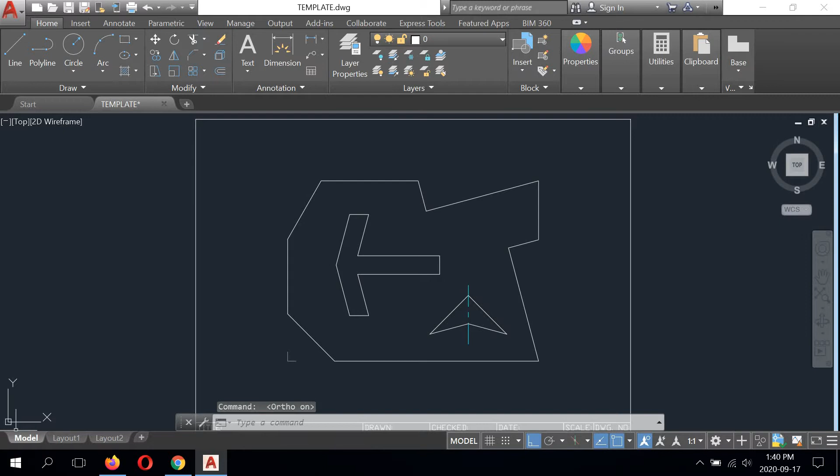And we're going to start with our linear dimension tool in the annotation toolbar, and we're going to begin by running this dimension here.

Now you can go in any order you like, as long as the end result is good, that's all we care about. So this first dimension comes out 12.

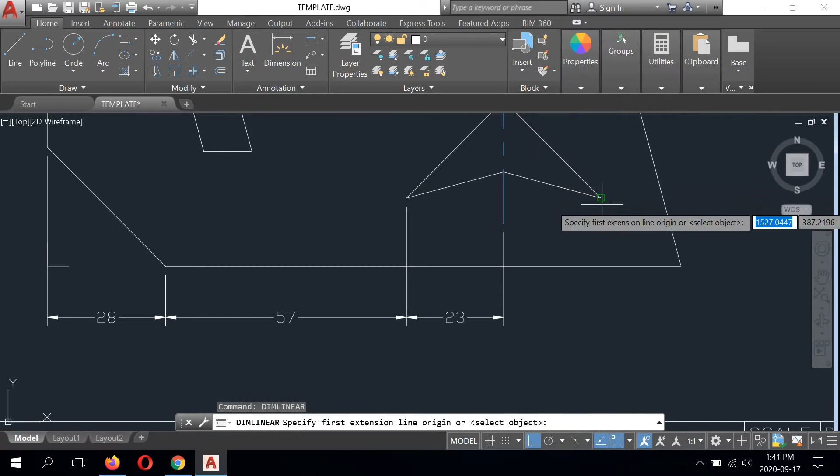So I'm going to run another linear dimension from here. Snap that one right in line with the 28. Right click, repeat, from here to the center line. Right click, repeat, and from here to the center line. Very easy.

Alright, we have a 16 dimension. We're going to repeat, run from here, snap that right in line with the edge of the arrowhead, and come out 12 millimeters.

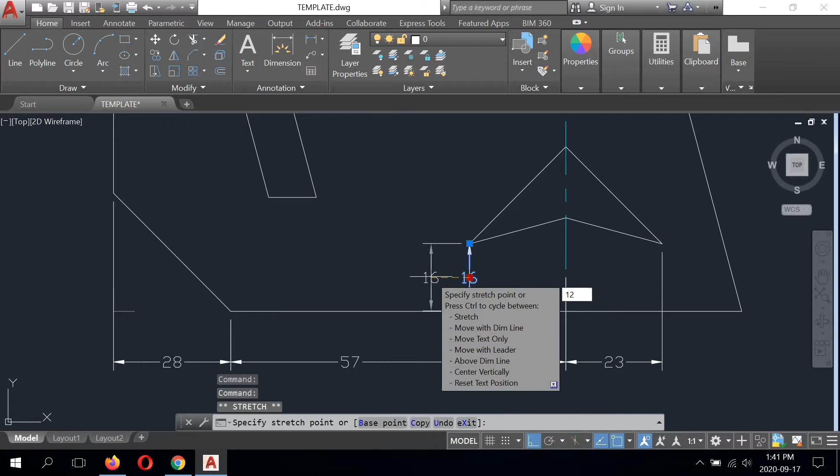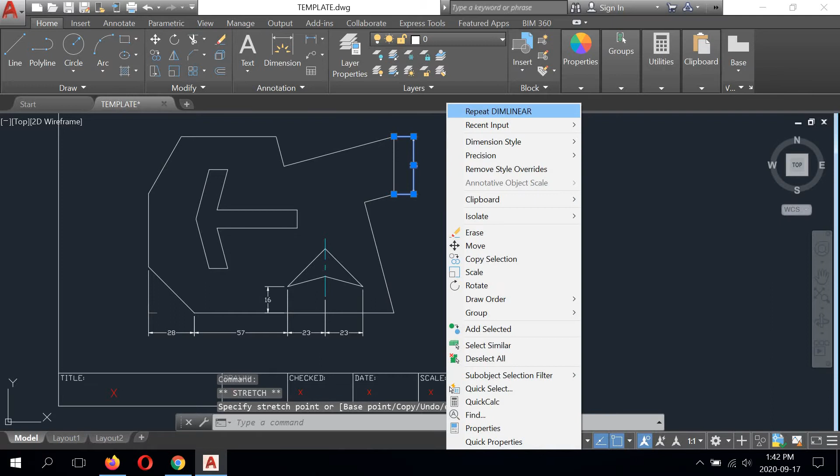We also have some dimensions to run on the right side, so we're going to right click, repeat dim linear, bring this one out 12, and then right click, repeat, and run this dimension.

Same thing on the top. Right click, repeat. We've got the 72 dimension here, so we're going to snap it in line with the part as you were shown and come up 12 millimeters.

Now this 20 dimension on this side, right click, dim linear. Here's a review of something I showed you in dimensioning the reversing washers. I'm not going to snap this one in line, I'm just going to come over here and touch the endpoint snap here, and that is going to bring it totally in line with the 72.

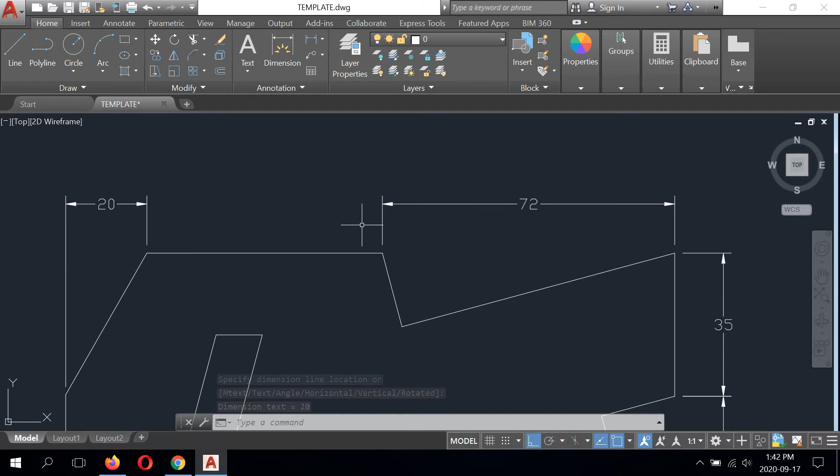Right click again, repeat dim linear. I don't need another 20. We're going from... well actually, I'm going to leave that 29 alone for now, and there's a reason for that.

So I'm going to do the 150 dimension. I'm going to bring this right in line with the part. And because this is the third stack, it's going to be 12 plus 10 plus 10, so it's going to be 32. So I'm saving myself some room here to put that 29 in later.

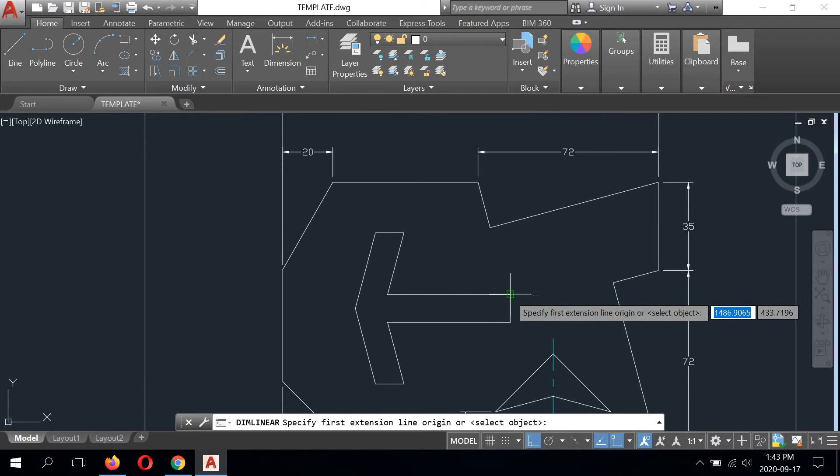All right, continuing on, we have the 49 dimension. Snap that one in line, come up 12. And we also have this 11.

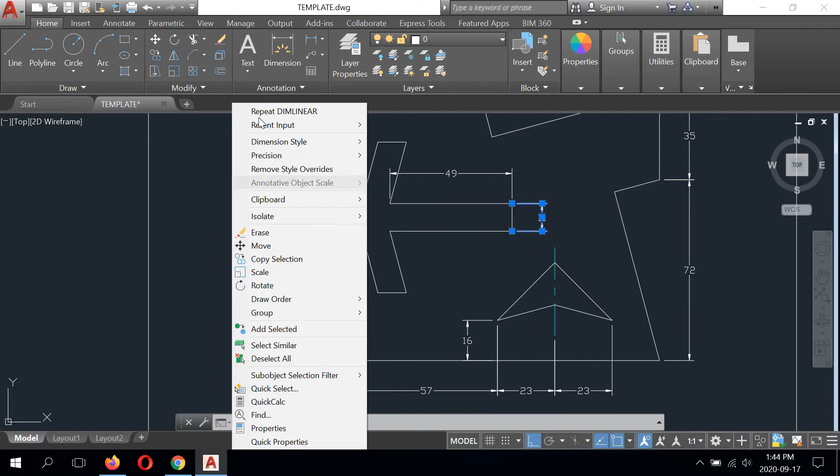And we have the dimensions on the left side as well. So repeat dim linear, we have this one to here. We're going to snap that one in line with this vertical line and come out 12. And the other two will be as easy as pie because we're just going to copy that reference point.

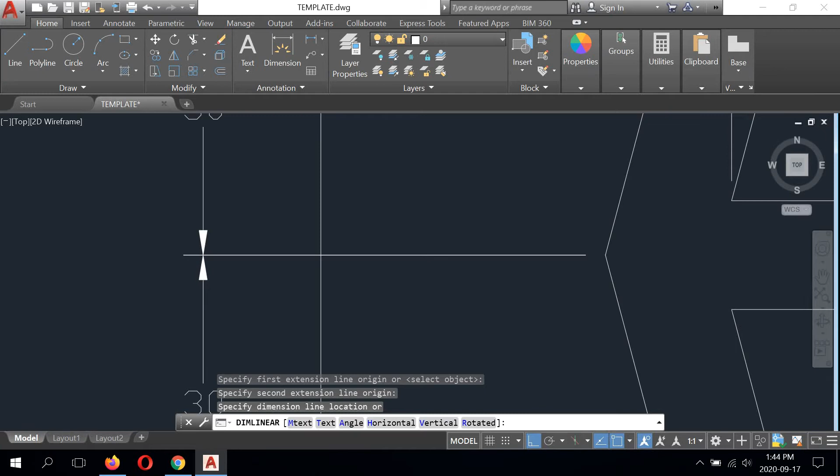Okay, so that takes care of almost every linear dimension on this drawing. At this stage, just to eliminate some contrast, I'm going to start throwing what I have onto the dimension layer already.

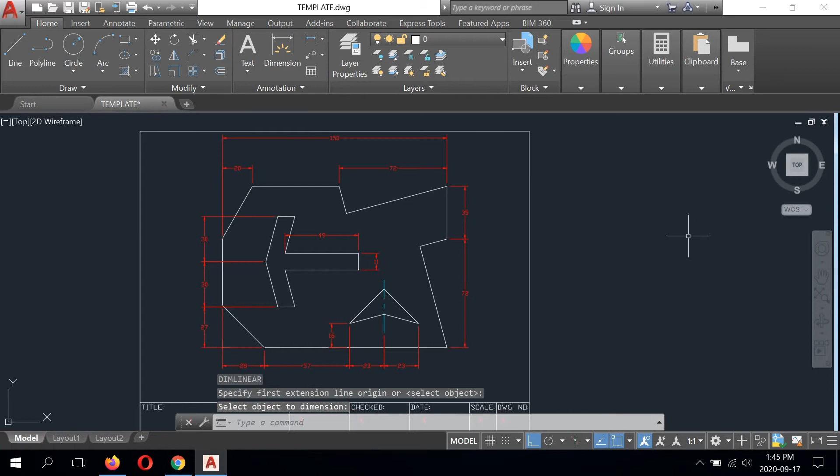Dimensions. Got it. All right, so we have an aligned dimension here, and this is something that we did on the Eye of the Eagle drawing. So we're going to grab aligned, grab the midpoint, and then find perpendicular, and click that perpendicular line, snap, I should say, and we're going to have our 11 dimension put in place exactly where it needs to be.

And we also have the 45 degrees and the 30 degree angles to do. So we're going to grab the angular dimension, pick the angular line and the horizontal line, and we're going to pull this until the arrowheads come in on the inside, like that, 45 degrees.

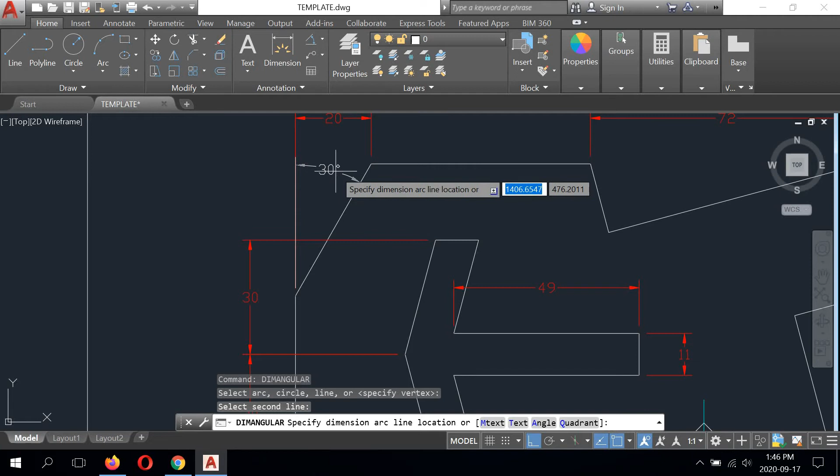We also have a repeat dim angular because we're going to do the 30 degree angle. Same thing, we're going to just drop it as soon as those arrows become inside, like that. Like I said, angular dimensions may not line up exactly with my drawing, but as long as they appear the way they need to be and they're close enough, that's all that counts.

Now, some of these other ones are going to be a little more tricky, and this is also a review of the reversing washers drawing when we had to do the bevels on the left and right hand sides. So I'm just going to take a moment and throw all this onto the dimension layer.

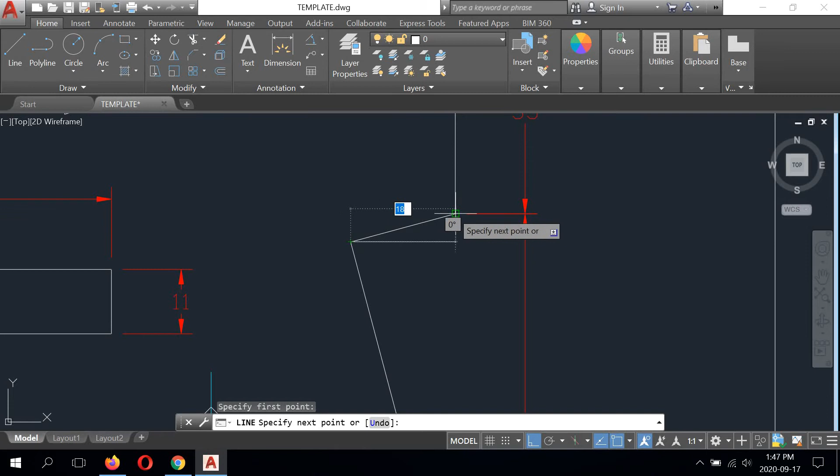Keeping in mind I can't hit the escape key, alright, so what we're going to have to do is draw some lines. So we're going to grab the line command. I'm going to draw a line at this endpoint, and I'm going to O-track it. This is something I showed you earlier in the previous lesson. Right click, repeat line, snap to endpoint, touch, O-track.

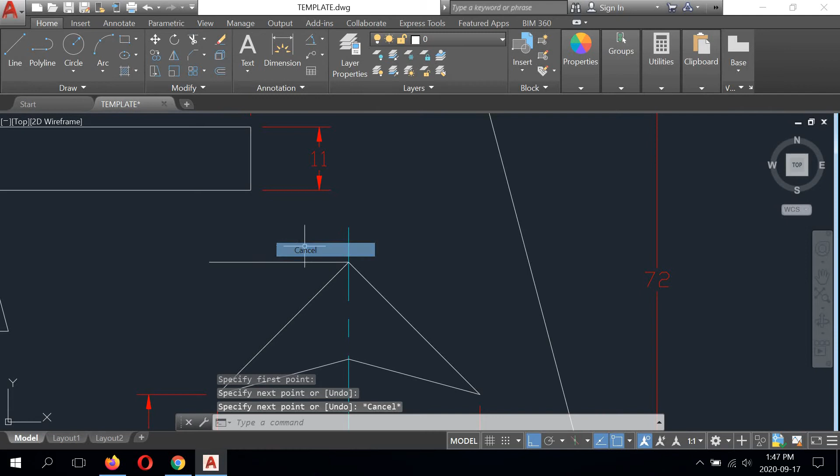I'm just going to bring this out to look similar to the image on the iPad. I don't really know how long it is exactly, so I'm just going to guess the length of this line. As long as it looks okay, it's good enough.

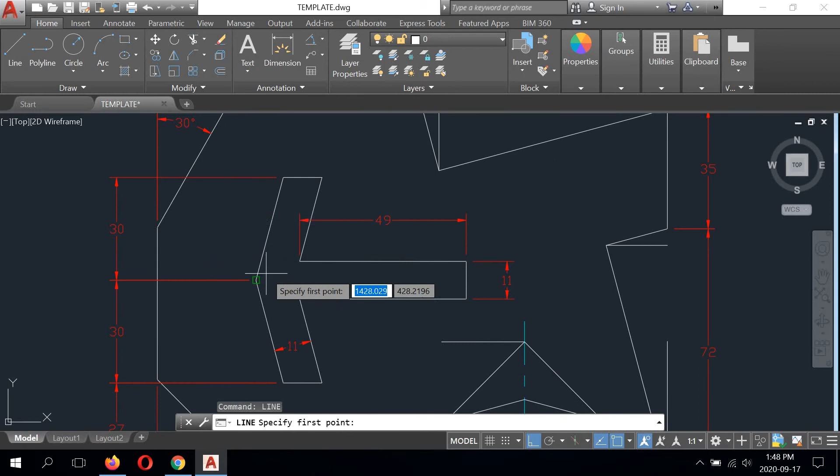We also have another one we're going to have to do here, and another one here. I'm just looking to see what I've done on my screen so I can try to copy it as best as I can. There's no point making it go super long. We also have another one here. This is part of the reason I left that linear dimension out earlier.

All right, so now we're ready to run some angular lines. Actually, I've forgotten one, sorry, there's one down here. Have that one come to about here. So now I believe I have them all.

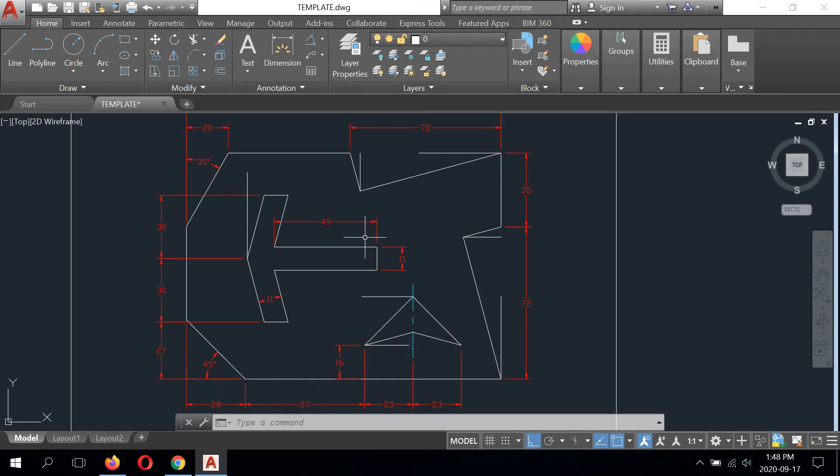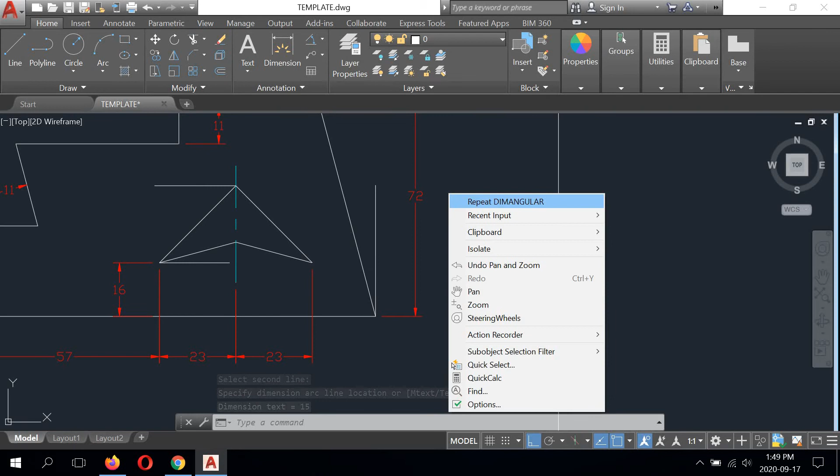So what we're going to do is grab our angular dimension, which is already set. We're going to select it, select this line and this line. And we've got our 15 degrees here. Repeat. We've got this one. That's 15 degrees.

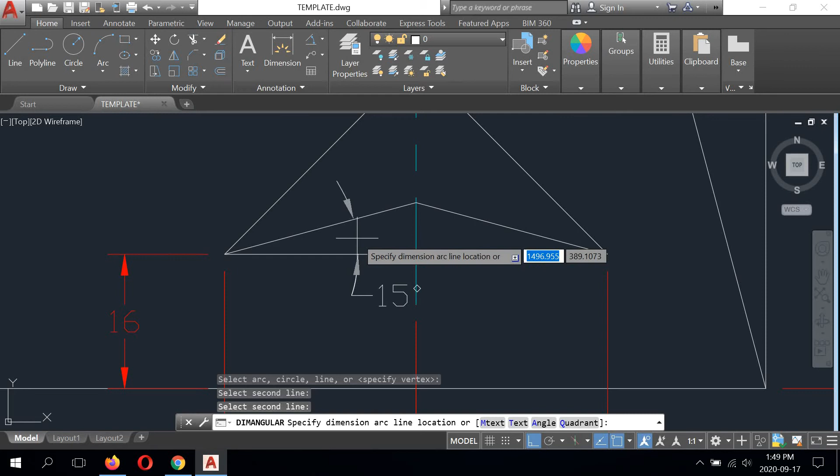Want to make sure that degree symbol doesn't sit right on that center line, so we want it a little off to the left, like this. We've got another one of those up here, and we have a 45 degrees here. We'll try to snap that arrow typically in line with where this one sits, like that.

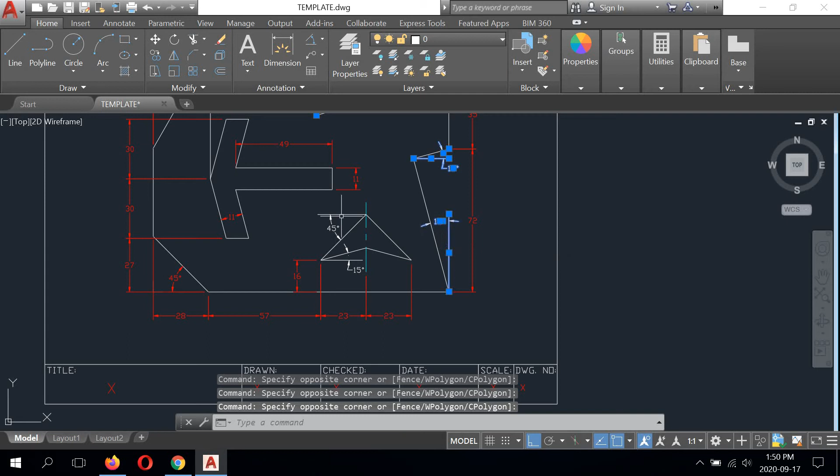All right, so that should be everything except that dimension, which we'll do in a second. So we're going to select all these and place them on dimensions.

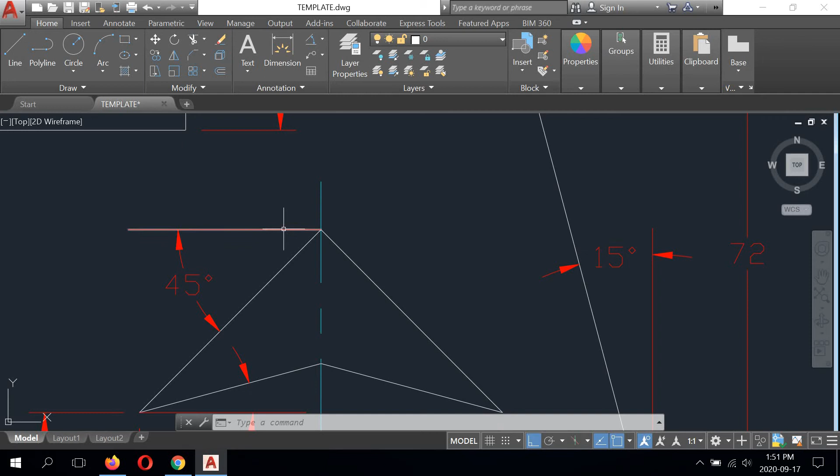One of the last things we have to do is modify that extension line, because we're basically faking this extension line into the drawing. We have to grip them all, and remember, we have to pull them in 2 millimeters so they look like the other extension lines that run naturally in the drawing. It's not really a first step, but it's one of the last steps, and this will cost you marks if you don't do it, especially on a test.

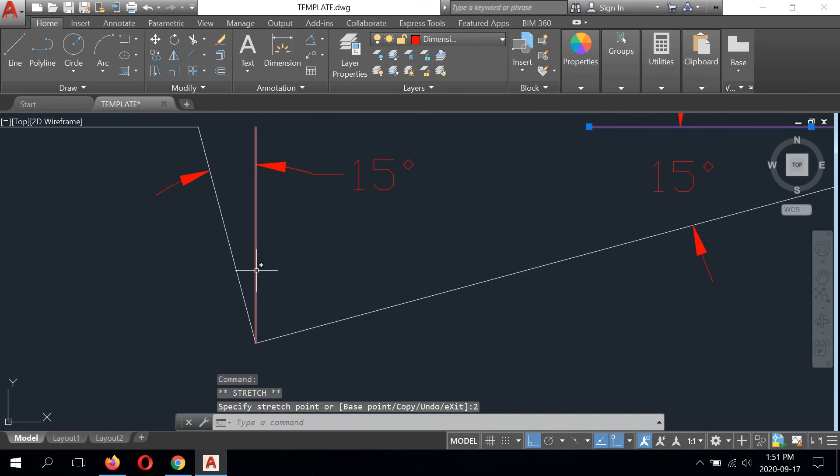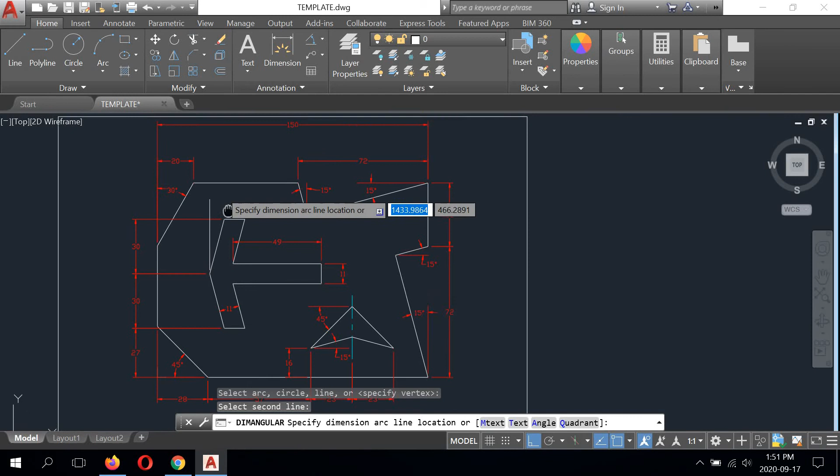So we're just going around doing this. We're going to have to do the same thing here. I forgot this dimension — there are so many dimensions on this drawing. This one has got a lot, it's easy to forget. So we're going to run this one. We've got the 15 degrees. Actually, I'm going to leave that one out for now.

I'm going to run the linear from here to here, so this one snaps to here. This one's going to come up 29. Okay, so we've gripped it 2 millimeters.

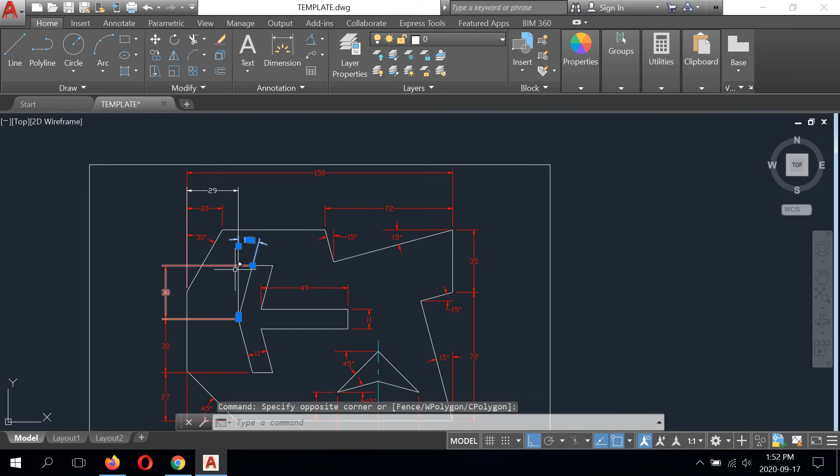We also have one last angular dimension, which is here. Okay, and that can sit there — that's how that looks on the sheet. So that is good. We're going to select this line and this dimension, and put them on dimension layers. And we have it.

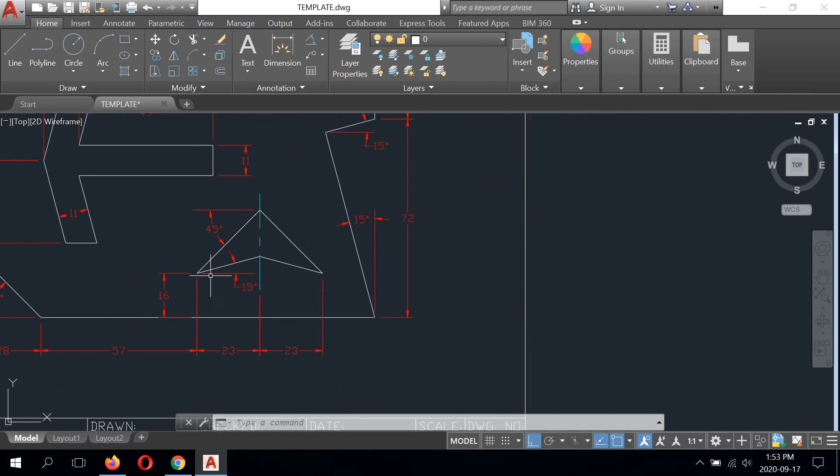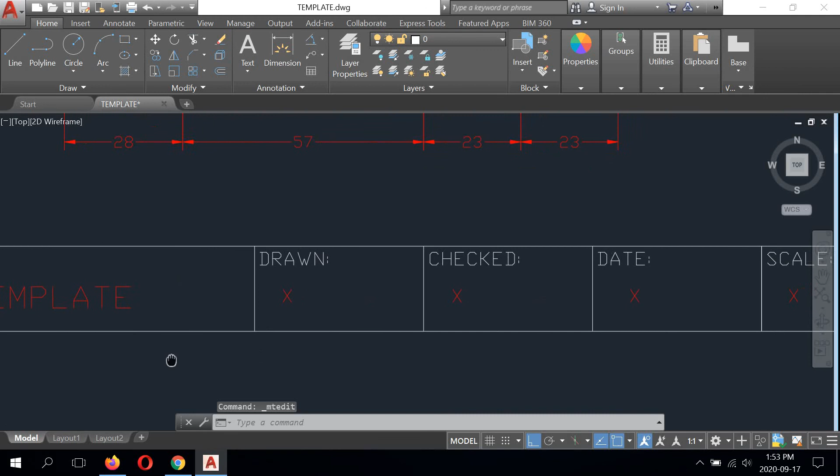So the last thing we have to do is fill in the title block, which is a very important step. On a test, this would give you 10 marks just for filling this in. I strive to make these templates naturally centered, so you don't have to really modify them, though you may have to modify your name. I don't know if anyone has done this at this point.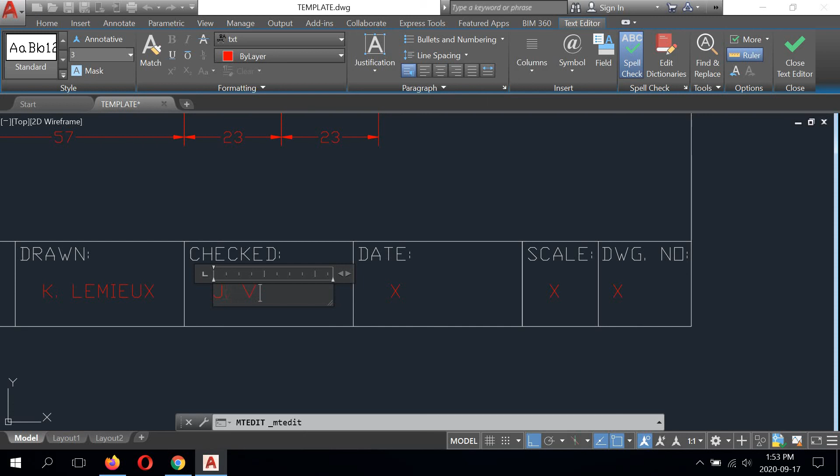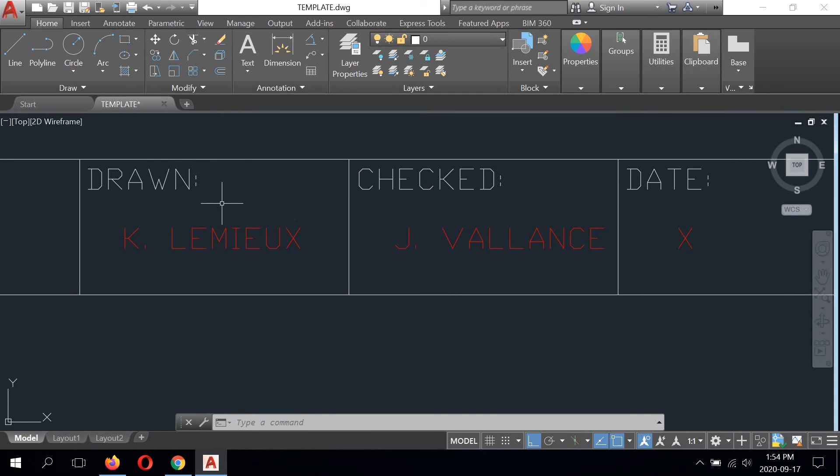Me — I'm the drawing creator. Checked by Mr. Vallance, who checks my work, except if it doesn't want to go on one line like this, you can just stretch this arrow here and it'll bring it up on one line, and of course this needs to be centered. So if ortho was on, and even if you're typing your own name and it's off to the side and not centered — mine is centered because I created this title block — but if you pick this, hit move, and just eyeball it a little more centered, that will get you full marks.

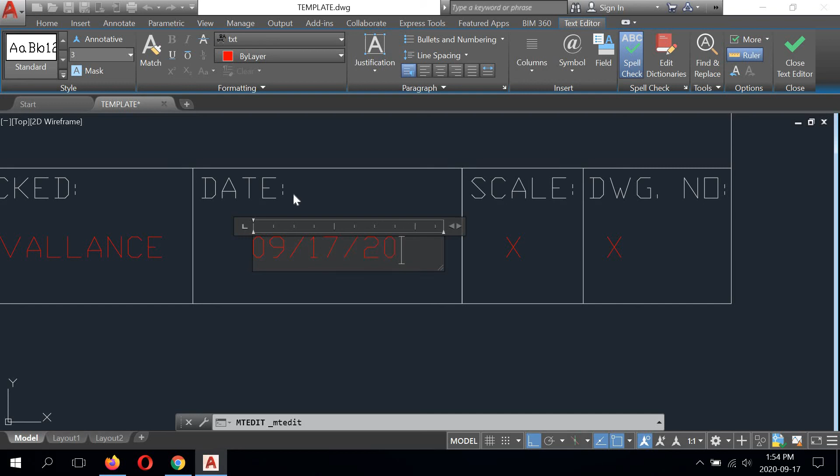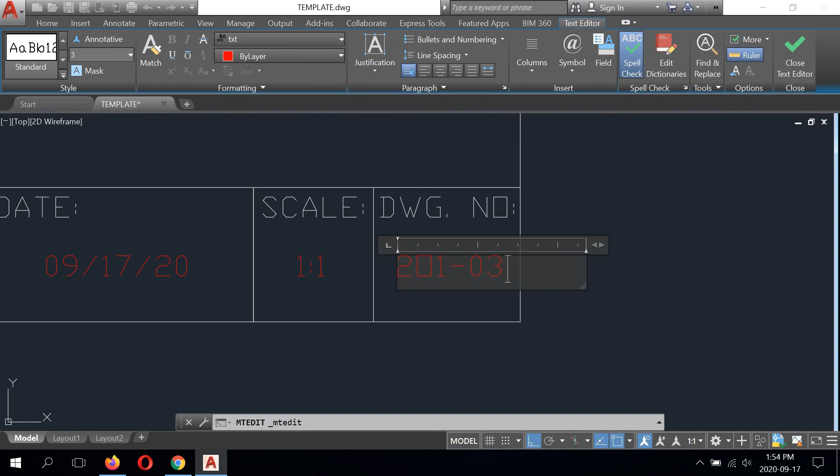So the date today is September 17th. The scale is 1:1 — all these drawings are 1:1 scale. And this is our third drawing, so it is 201-03. And if I wanted, I could probably just center this a touch too, like that.

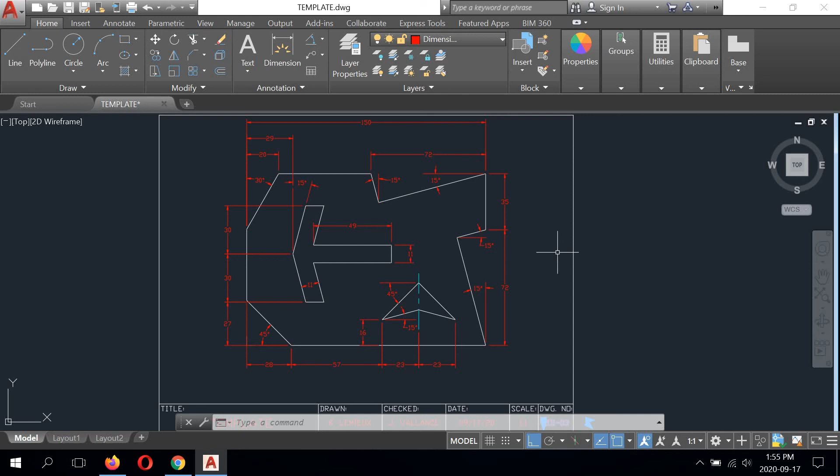So that concludes the template. That is your full dimensioning lesson. It incorporates a lot of review from what we already know, but this one has a ton of dimensions on it. I think it's great that I was able to go through it — even I forget them from time to time as I go through this. So you really have to take a look and make sure you're getting everything done as per the instructions or the reference page on the iPad.